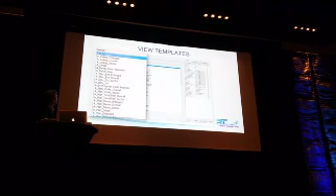Collect all the things. Again, I just want to come back to this because data collection was really important for us when we went through this process. And this wasn't just from project architects or interior designers. It was from leadership, design leaders, project managers. They're all involved in that process, and it's very important to get everyone's expectations on the table, I guess is the way to put it.

So obviously, I'm sure lots of different people have lots of different ideas about what your rendering should look like. Some people want that final, rendered, ultra-realistic image. Some people don't, some people want it to be very white and diagrammatic. Some people like people in their images, some people don't.

And a lot of this goes to, at least for us, the different offices. And I know those guys are still going through it. They're still sort of breaking everything down and finding the common place.

Again, actually mentioned this earlier, but hidden library. Find it, get it, put it somewhere where everyone can use it. Don't be that person.

Container files. This is one way that I've handled having a lightweight template. You just have another Revit file and you name it appropriately, and you put your details in it, your partition types, your schedules, your families, your groups, because then these can be shared with others. So if you have architecture and interiors, you can put both details in there. But at least your template then isn't set up for one discipline, then you just bring those guys in.

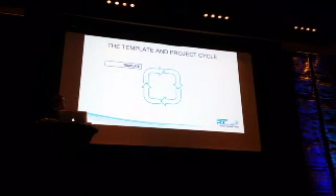All right, let's talk about some project cycle stuff. You're starting with a template, you got a project, yes, got work. You should be experimenting in that project.

Now, I remember saying that, and I got scared looks.

Because I think when I said experimentation, they might have taken it as I'm going to be spending a lot of time trying to get something else to work instead of actually documenting the work. But I think this is very important because every project you're going to learn things, and every project is different.

And then implementation. You take all that knowledge you gain and implement it, feed it back into the template. Then you start building in things - we would have meetings on, we got this new project, what might be an issue for our workflow? There was all kinds of crazy things that came up. But it's very important to have that meeting beforehand and say, it's not just that we're into this.

Testing ground, experimentation, lessons learned - very important. That's another part of the quality process we're doing at KSS right now - sitting down afterwards and saying, hey guys, what went really well and what went really bad? Because both are very important. It's not about looking at the bad and thinking that person or thing didn't do well - it's important to know because then you share that with people. And then document new workflows. Seems like no one has time for this, but when it does happen, it does make a difference.

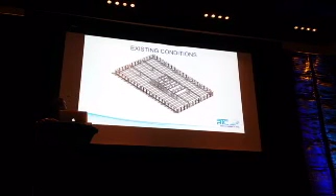Here's something pretty typical of some of the interiors work I worked on - that's all we need. Sometimes it wasn't all gutted out already, so we had to draw existing walls and things of that nature, but those can be done relatively quickly.

Finish plans. Now, I'm hoping someone talks to me after and tells me they have a different workflow for this, because I want to know all the different workflows for it. But this is the one I came up with.

They were obsessed with this symbol - these symbols. Now I know some of them are common, but this guy in particular had to show it like that. I couldn't do it the simple way - originally I was like, oh, we'll just do a room schedule, north, east - oh no. No, I got yelled at for that one.

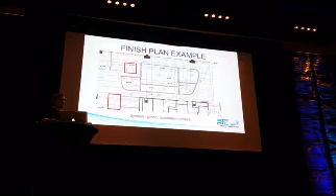So these were actually some of the first things I made because they were incredibly important to the documentation. Here's one of our finish schedules - now everything from here is reporting to here. Great.

This is what I did. I did a generic annotation family symbol; you put a generic annotation family in the model and it's under symbol. Yeah. Downfall to this, can't use shared parameters. But at least you can build parameters into it, and then you can report that. So again, these little legs, these little leaders, that was important. That's another reason I did it this way, is that you can add as many as you want to. So if you're going around a corner, or you have some kind of complex geometry, you can keep adding these guys.

And the way you schedule those, go to schedules, go to note block. Again, it's like generic annotation. Might not be that obvious, I don't know. All these were preloaded all the time, talked about what was important. This is also part of that data collection, because as we found, when we started collecting schedules from other offices, they had other information. But we want one template as much as possible. Now if there's a very good reason to have different information in different schedules, that's fine. We're not trying to tell people they can't have that, but we took a critical eye to it.

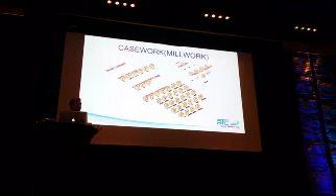Because they had run into issues, at least in Chicago, where they didn't show the hardware right, they didn't get the hardware, even if they labeled it in their millwork details. So that was one of the reasons why they were so concerned about switching their workflow, because they needed this stuff to show accurately.

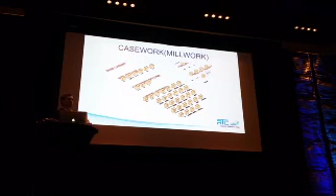Zoomed in case you guys can't see that. And here's some of the parameters that I had in. You could add shelves, you could adjust the shelves to the heights you wanted. And a lot of these are instance, because I found it easier to work with, but they could easily be swapped to type parameters. Also overlay versus not an overlay, so the gaps would adjust automatically very quickly.

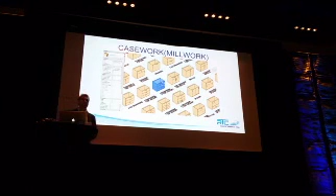How many cabinets did you have? So I had one for the base cabinet, I had one for overhead, and one for tall cabinets. And then everything else was just fed in. And everything else was shared nested? Yes.

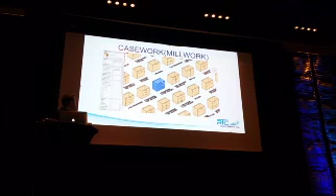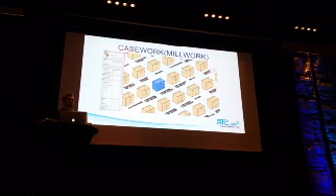No, these were also, you can schedule these. Now, for our corporate interiors, we didn't schedule millwork, but for our lab work, I don't know if they've started doing it, but they had a specific naming convention that they used, so I built that as a tag, and I built extra parameters down here that we could use for that. Again, built for reuse, built for everyone, not just one type of work.

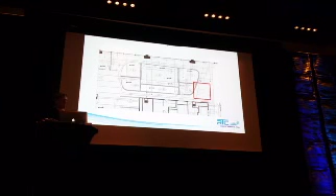Real quick, I just wanted to show this. Reception desks. Man, I've modeled so many reception desks. Holy crap. This is one case where I did do it in place, just because it was so unique to this client that I knew I wasn't ever going to use it again.

But I think it's probably a good idea to have maybe a couple different options of reception desks, even if it's just for schematic design or space plan, that you can throw in something that's flexible. But a lot of times the reception desks were very unique for our projects. They weren't bought, they were made. Also helps with documentation.

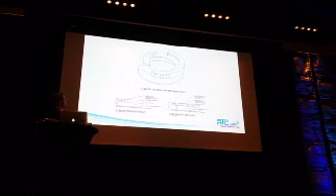So visualization. This is the second interiors project I worked on at HED. All these graphics are modeled in place, different ceiling type. Actually, this is a family that I built with the slats and everything. This was built from manufacturers' data. These families were all from manufacturers' websites. And then that was the finished product built.

So this is sort of when they realized how powerful that new workflow was, because they weren't losing, they were getting what they were seeing in their documentation and in their visualization at the same time.

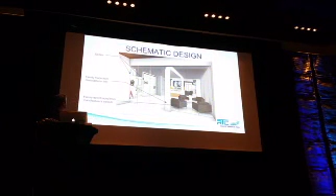This was actually the first interiors project I ever worked on, first Stryker. And this was schematic design. So decals all over the place. This thing was custom made. I actually forget what it was called, but we actually ended up not using it. And this was design development. Big change.

I actually found a mistake because somebody did post-production and didn't cut. They didn't apply the material. So I just kind of wanted to highlight all these things that sometimes you do have to do post-production. Like I couldn't figure out how to get the logo across the glass like that. And you probably could do it. You probably could build custom panels and all that kind of stuff, but it was not worth it in the time.

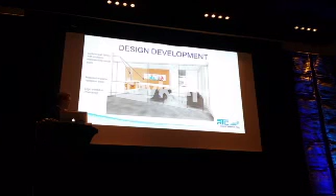Lessons learned. For me, it was rare for other disciplines to be in Revit. I know some of you mentioned that you were lucky enough to have that. That's great. But we did sometimes model if we had existing information of beams and stuff like that, and we didn't have a structural engineer, because most of the time we didn't have a structural engineer, then we would model it. We would take the time to model and understand the project better. Always be careful what's type versus instance.

Also, I wanted to bring up permitting requirements. There have been projects a couple times where it's in a high-rise, multiple floors, but they're permitting them separately. Don't put those in the same model. For us, it was better, and this was an upfront question of, okay, how are we permitting this? How are we bidding this? To have those in separate models, because there was certain information we need to show on the title sheet, and we didn't want to change naming conventions. I think it was like AOO or something like that for interiors at the time. But that hurt once or twice.

And then space planning. When I left, they were still doing a lot of space planning in CAD, and that was because of what I mentioned of the senior designer being able to just rock and roll. She could just fly. She would always give me crap. She's like, oh, I can still do it faster in CAD. I'm like, yeah, but that's because you have like 25 years of wisdom over me who's doing it for the first time. So that was still a challenge. It can be done, and we did do some of it. Usually when I was involved that early, I kind of forced that to happen. Usually with area plans and keeping stuff very light.